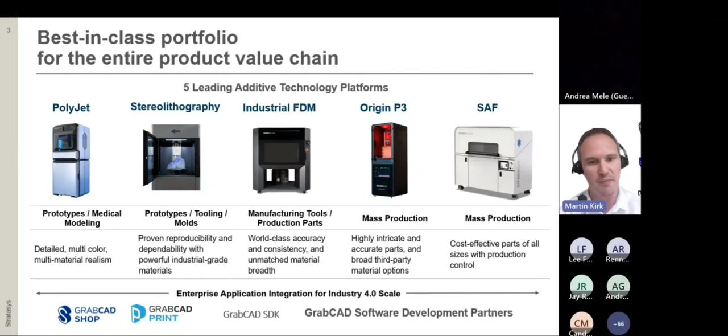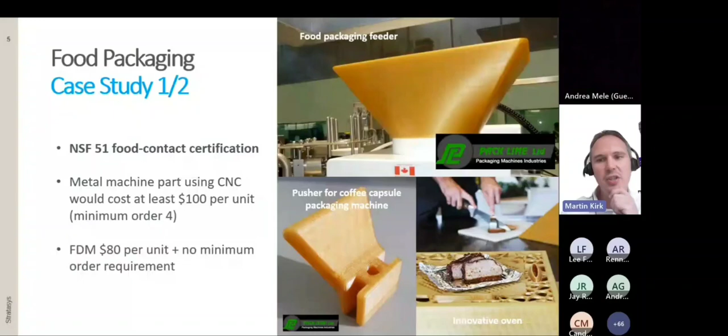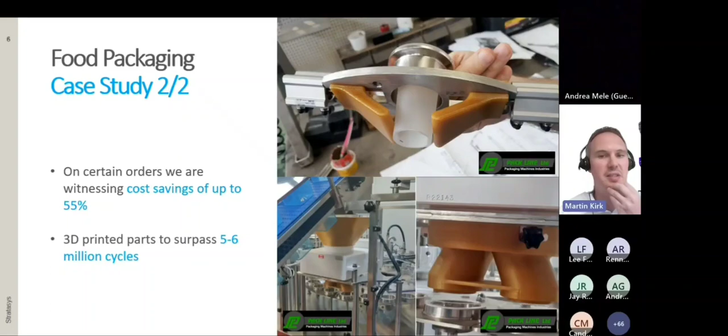Switching materials to Nylon 12CF, this is Rocky Mountain Chocolate Factory. They're printing end effectors for lifting wrapped chocolate bars. The existing metal part was malfunctioning, so they needed replacements with faster lead times. They switched to Nylon 12CF, reducing machine downtime, and they can print spare parts on demand, and it was a cost saving.

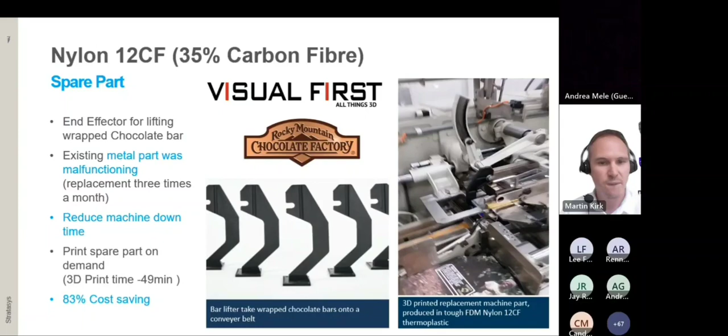This is Eckhart, develops automation tools for Ford, again using Nylon 12CF to replace metal components, but they also use ASA for simple non-structural jigs. The solution is lighter and cheaper than machining, and it's great for end-of-arm tooling because of the weight savings.

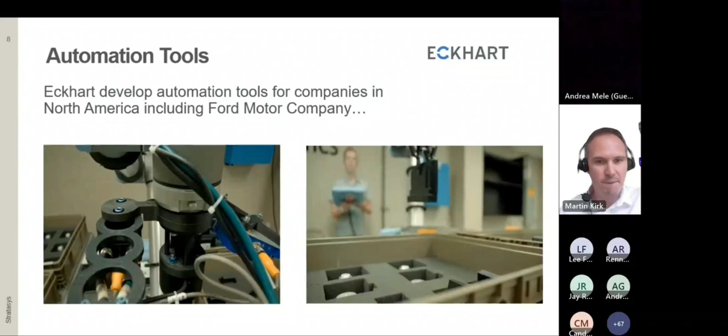This is a nice example from one of our customers. Hopefully, is the video running, Nancy?

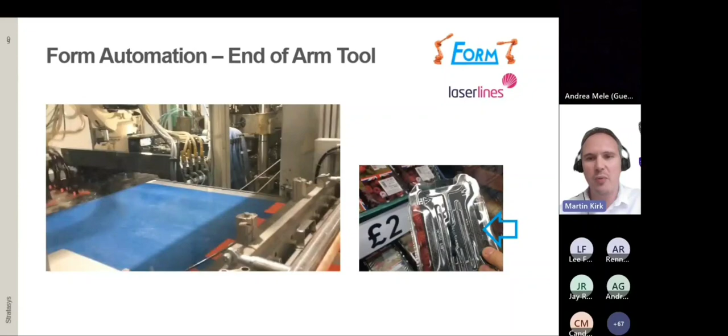Yeah, great. This is a nice example from one of our customers. It's form automation, so pick and place. The challenge was to improve the existing process for end-of-arm tooling. Basically, the gripper fingers were bending out of shape. You had small loose parts which could possibly fall into the food trays, and the components were manufactured externally.

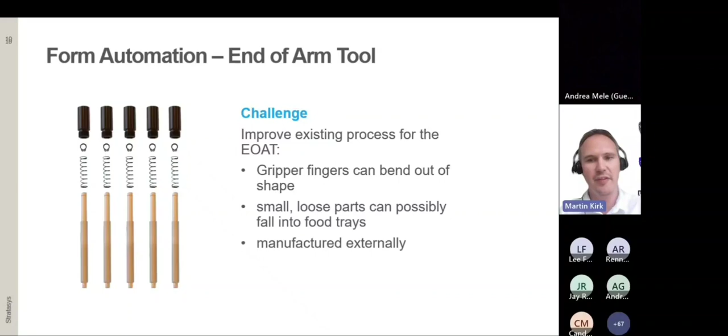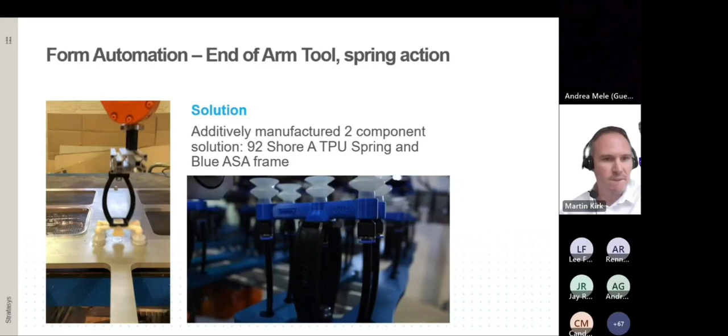So the solution was to additively manufacture 2 components, a 92 Shore A printed via FDM as a spring, and then a blue ASA frame. The assembly reduced from 20 to 2 pieces, so easier to assemble. The flexible material is less likely to break, easy to replace if necessary, resulting in reduced maintenance, and again, it's lighter and cheaper to manufacture.

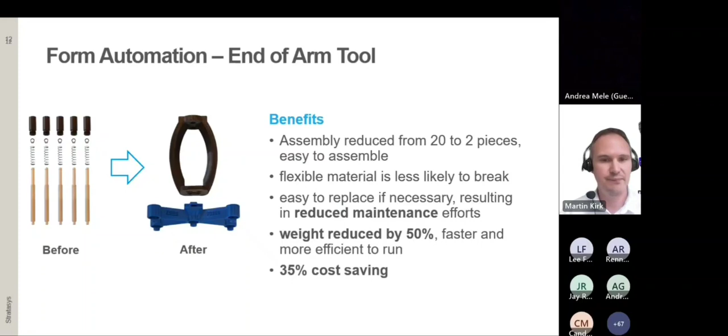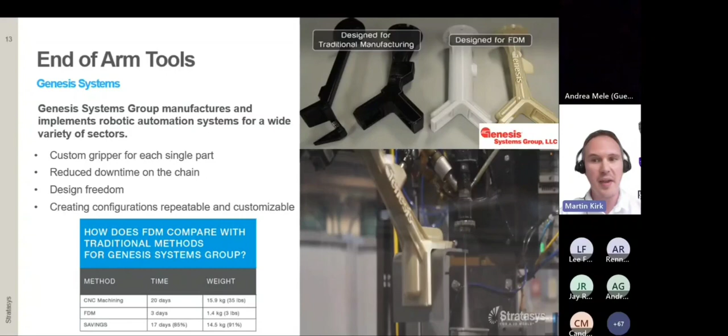This is an application from Genesis, custom grip for each single part. So custom parts every single time, printing in Ultem, ASA, Nylon CF, design freedom from AM, and then allowing repeatable and customizable parts.

Engine parts can free up CNC machines. So for production parts, rather than machining the fixture, you can directly print the fixture and the jig to free up the CNC, and then you can obviously machine the part that you want to machine using the FDM polymer substrate.

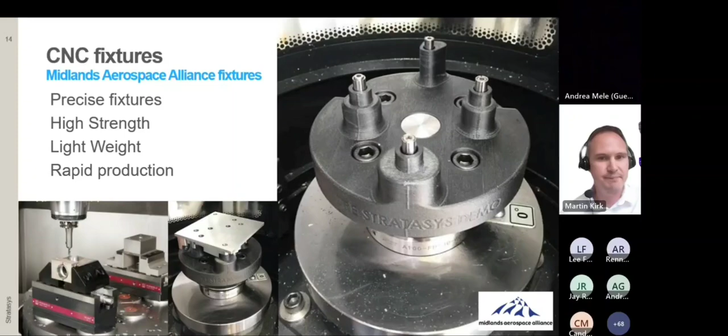It's great for obsolescence. Metal parts can be replaced with Nylon 12CF. It's 3 to 7 times lighter than aluminum or steel. It could withstand 1,000 bar of compressive strength. And again, it can be faster and cheaper than machining.

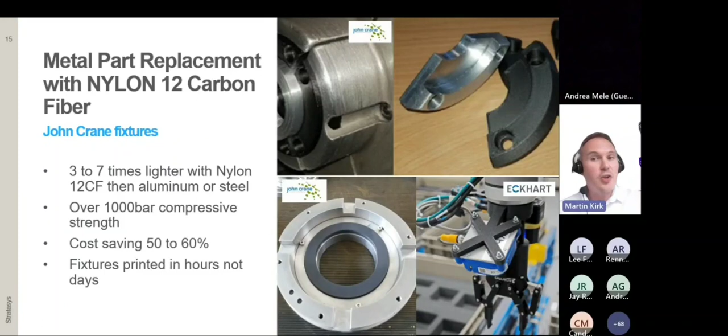You can print form tools. This is an example from Safran, forming 1.6mm aluminium, 500 parts possible off a single tool. You can also form titanium, so that's a 0.5mm thick titanium part. The tool has no finishing or coating required on the tool and can still withstand 500 parts through a cycle.

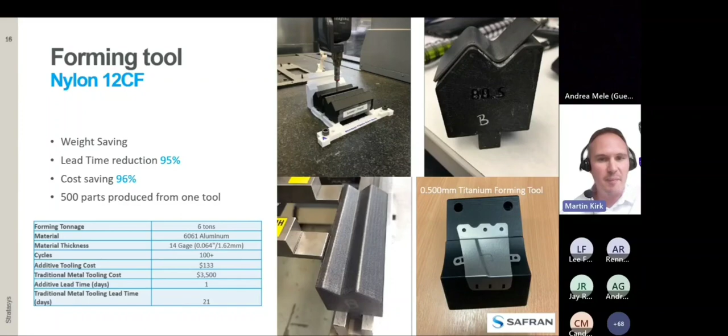You can print for aerospace. Boom Supersonic print hundreds and hundreds of drill jigs, fixtures, assembly jigs, but you can also directly print functional prototypes as well as flight parts, specifically in ULTEM 9085, besides the certificates for aerospace for in-cabin use.

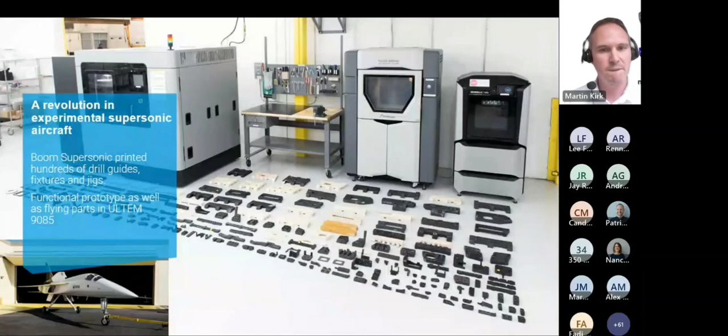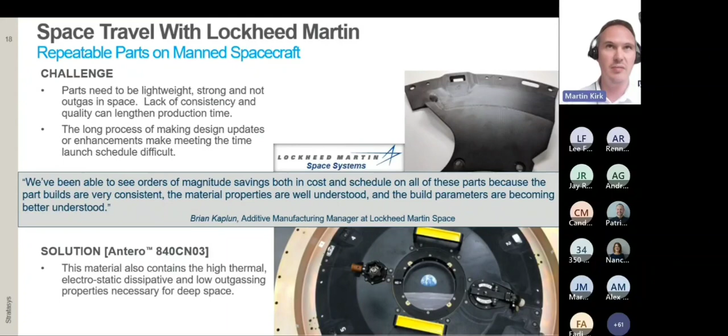So a quick summary of where FDM is. Basically, yes, it's great for prototyping. I still use it for prototyping on small little hobbyist machines. It's great for PLA, quick, simple geometries. But what we've seen in developments is the composites, which has opened many, many more applications like CMM fixturing, so really stiff components, form dies, even production spare parts using FDM.

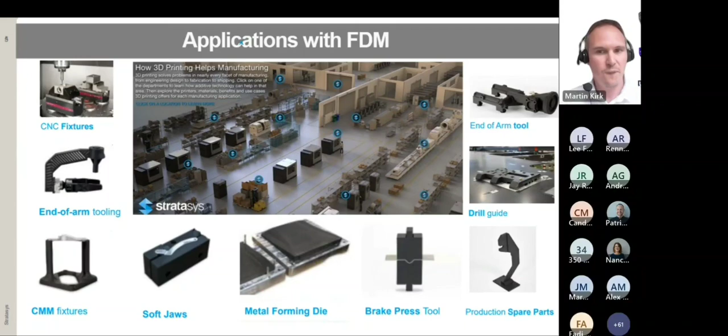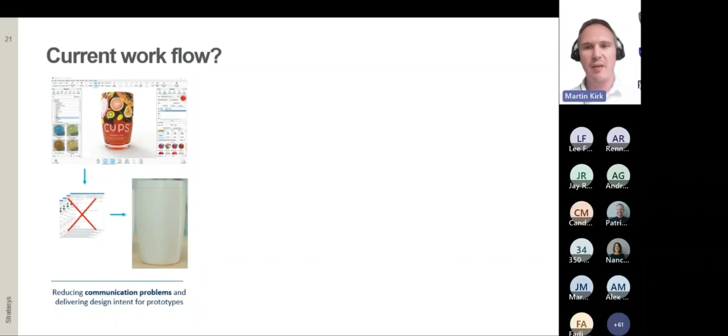Switching technology, next PolyJet, the world's leading full-color multi-material system. Not to poo-poo SL or SLS, but if you're doing packaging, it was a single material color. And if you wanted full color packaging, you would then have to glue, stick, or paint the SL or SLS part.

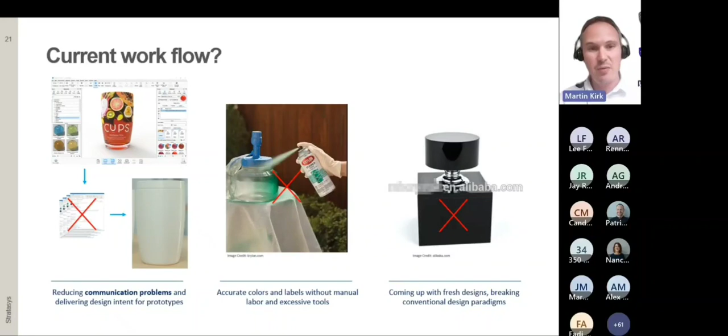What you can now do is print directly from design or rendering software like KeyShot, and then import directly with a 3MF file into GrabCAD.

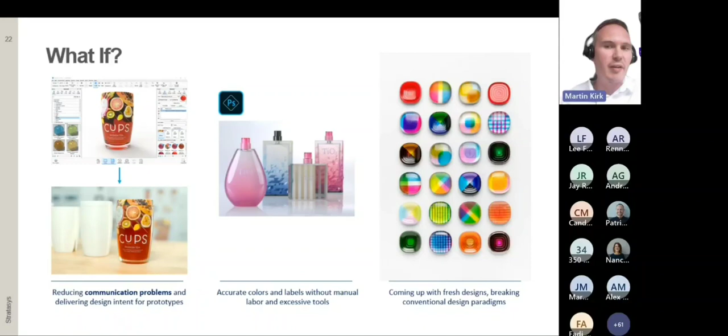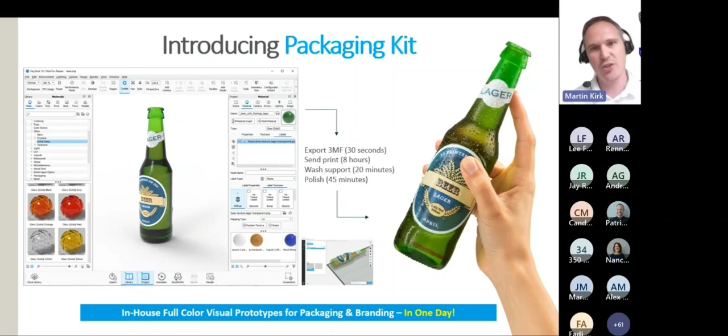So this is a nice example, a bottle that was printed in 8 hours, 20 minutes to wash the supports, and about 45 minutes to polish, either via wet and dry sanding or a polishing wheel at low resolution revs. I'm still blown away that that is actually printed, with the water droplets and everything.

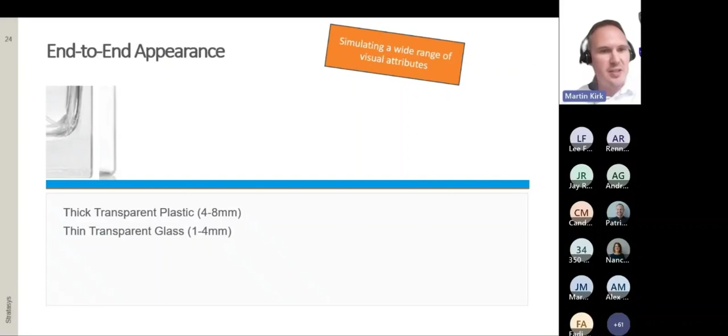PolyJet allows you to print thick transparent plastics, thin transparent glass, and solid colors. There are 500,000 Pantone reference colors available. You can print stained glass, and spray paint mask and clear sections directly printed.

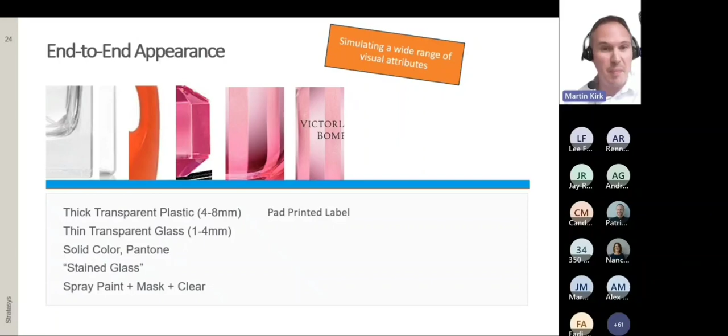You can print pad-printed labels, glue labels, shrink sleeves, liquids, or you can really show off and print all of the previous in one.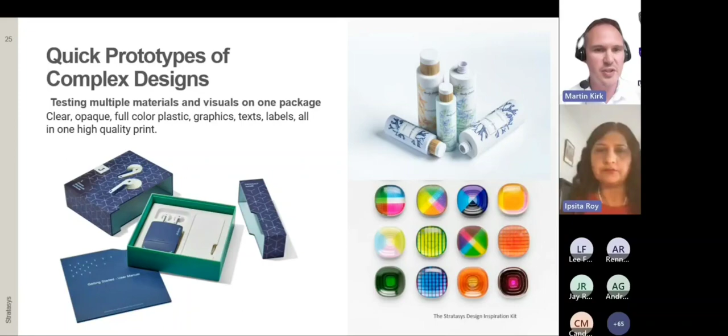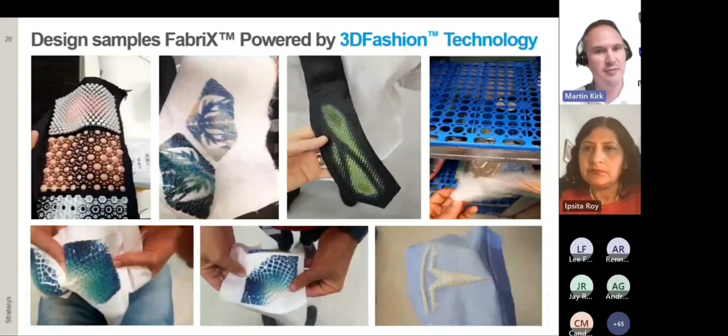You can also print on fabrics. Using the FabriX add-on, you can print on cotton, suede, and you can even print on nets. This is printed with PolyJet by laying a few layers first, a couple hundred microns, laying the net down, and then continuing to print to produce full 3D printed nets.

And this one of my favorites, with full flexibility. I love this one.

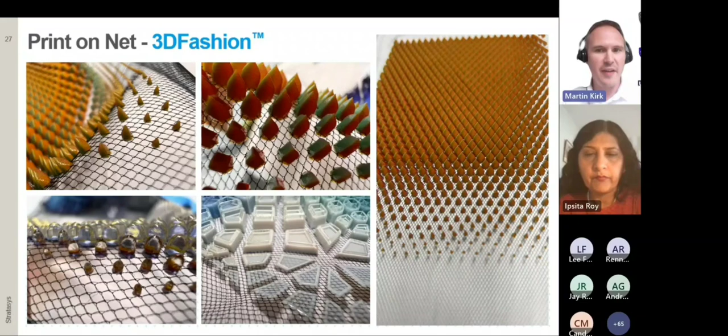Further examples of applications with fabrics printing: you can print consumer wearable electronics, again pausing the print, adding electronics, and continuing to print. Concept car interiors—I know a few automotive companies are discussing production with PolyJet—and of course fashion, again with production applications in fashion.

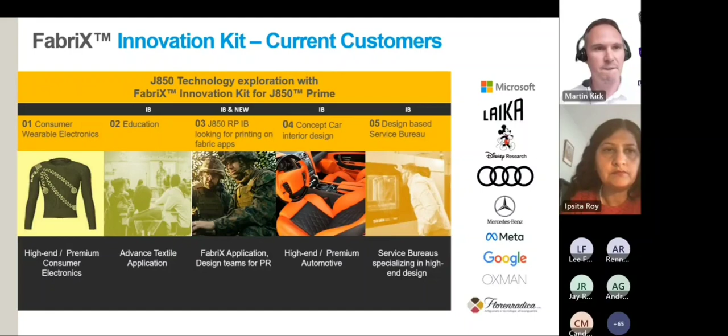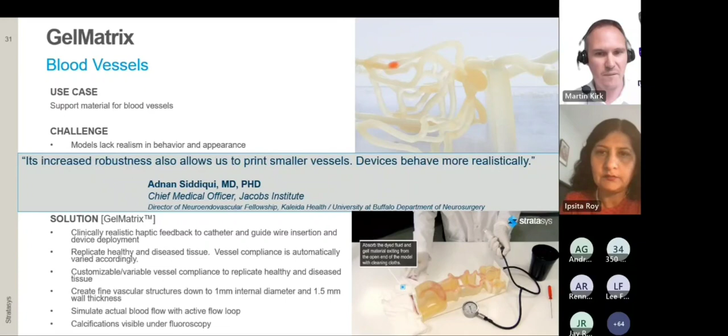There's a material called TissueMatrix, which is the softest material, I believe, in 3D printing at 30 Shore 00. Around the firmness of a gel shoe insole as a comparison, it's significantly softer than the original Agilus material we have on PolyJet.

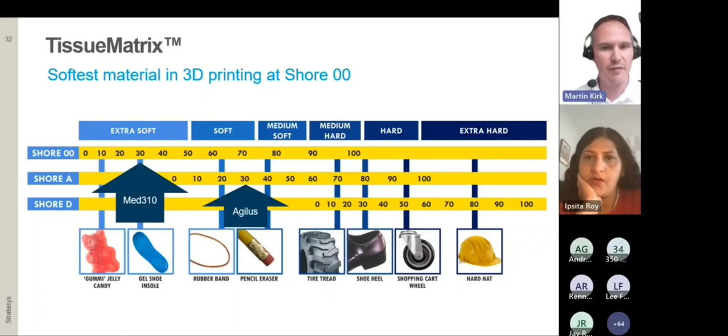The reason it was developed is tissue matrix can be used to replicate heart tissue and tactile feedback that translates to clinical test cases. It feels the same, it cuts the same, so it's more of a direct comparison to surgery. It's great for either practicing for students, or doing an MRI, printing the patient's heart, and practicing before you actually do the surgery.

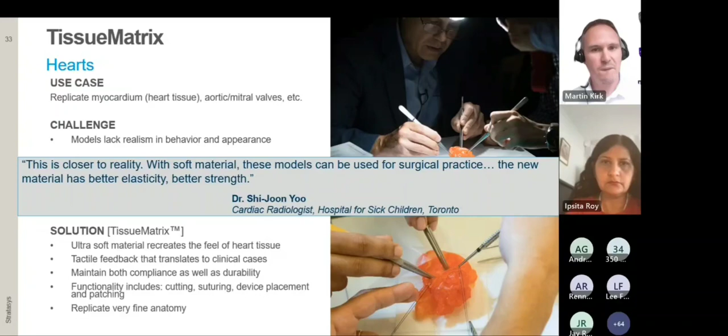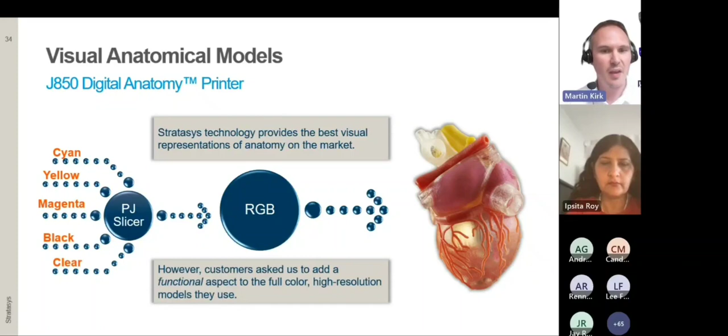So PolyJet, to summarize, can print visual anatomical models, full color. It can print functional anatomical models that behave and feel like the real thing—flesh, fats, bones, connecting tissue, skin.

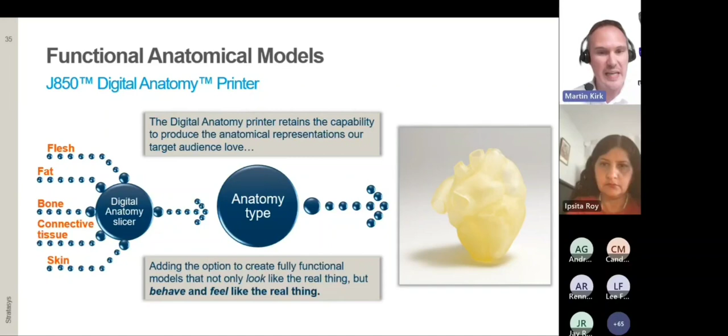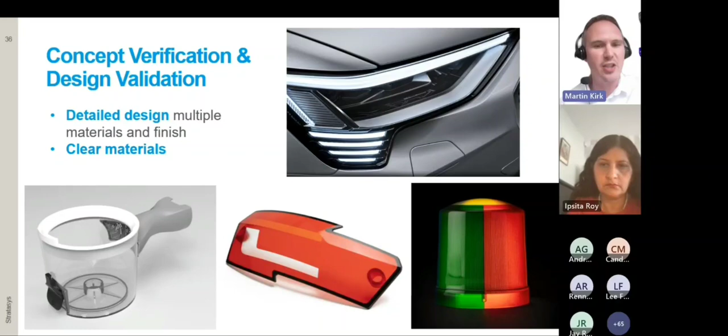It's great for concept verification and design validation, although I would probably use SL for pure transparent parts—it takes a lot of polishing for PolyJet transparent parts. But you can also do functional performance, up to 7 materials printed at a time, so you can do multiple assemblies as a digital mix. But because of the polymer science for PolyJet, functional—question mark—yes for fashion, but not actually fully functional for production, like in an automotive under-hood application. No for PolyJet.

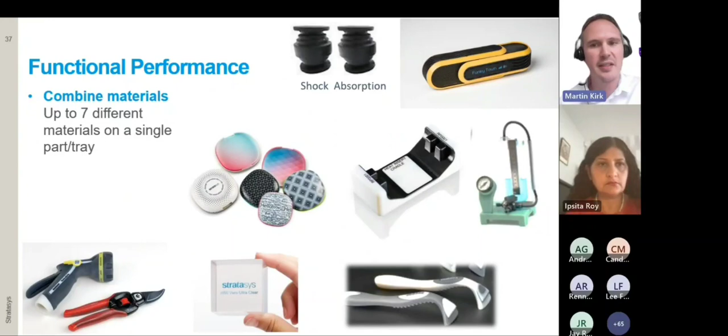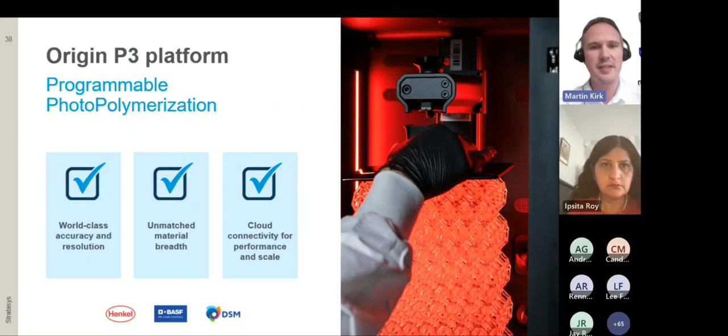Switching technology, Origin P3. This is out of California; Stratasys acquired them, I think, about 2 years ago. This is DLP printing, but how it differs slightly is Origin controls the build sheet.

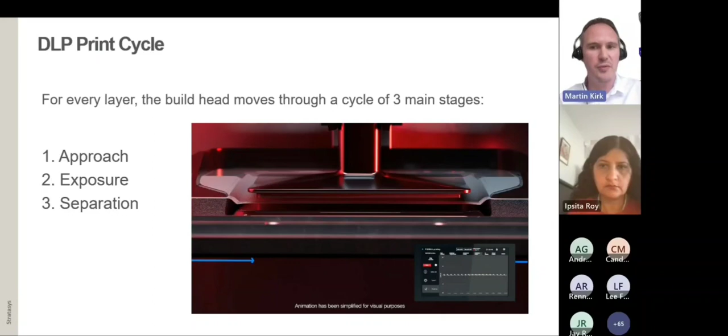So it's controlled and creates a bit of a curve, giving really low separation forces, which creates really beautiful surface finishes and really accurate parts. You can also print incredibly flexible resins, which on most DLP you can't, because of the separation forces causing deformities as you separate.

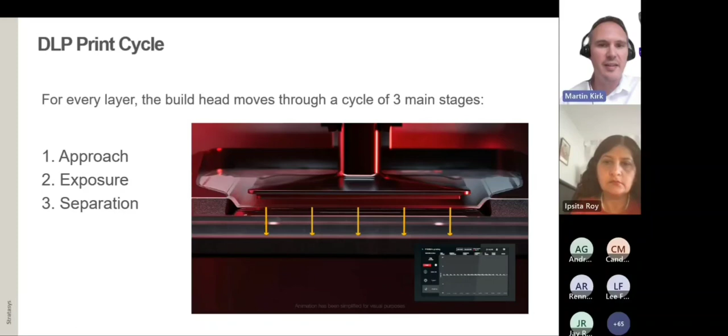A couple of examples, let's look at the Loctite applications. This is Loctite 402. It has great elongation at break at 230%, good tear strength especially against PolyJet, with a number of Shore values available. It's also, because it's DLP, a lot faster to print.

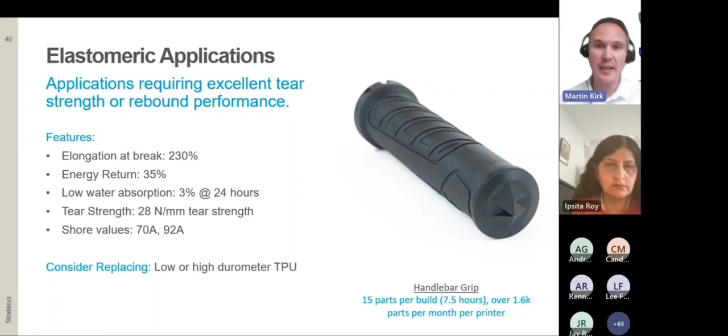Henkel Loctite 3955 is one of my favorite materials so far that's come out. It can be used for aerospace. It's got a UL 94 V0 flammability rating, 300 degree heat deflection temperature. The only downside I found with this material is elongation at break at 2%.

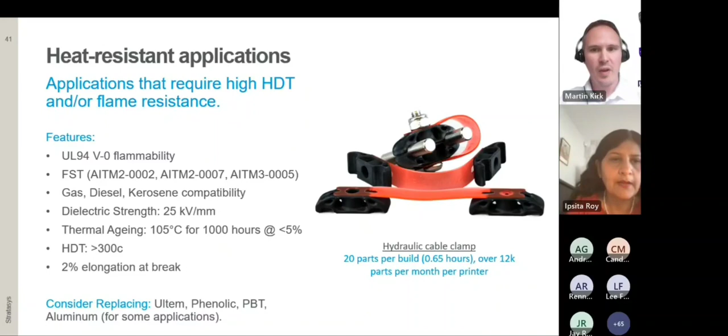Automotive interiors, exteriors, under hood - BASF ST45 is great, Loctite IND403 is good, tough, durable materials that can be used in production. Again, question mark on certificates for these applications, but it's coming.

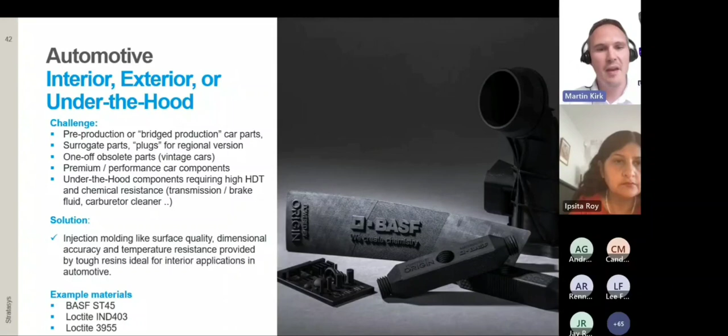Another tough application is Loctite 3172. I really like this material because of the elongation at break - it's got 108% elongation at break. So that one's been bent on itself and it still returns back to its original form. It's great for replacing HDPE or impact modified polypropylenes.

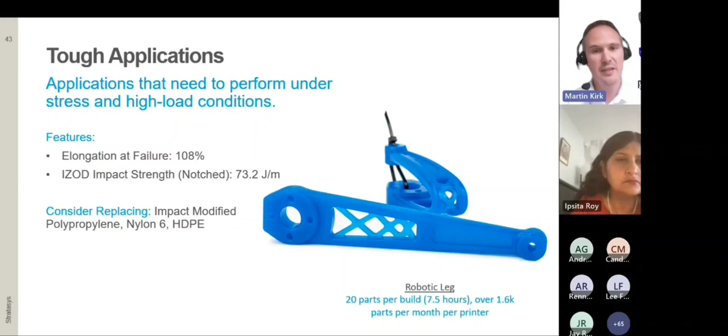It's a really, really nice material to print with as well. The Loctite 3955 is quite tricky to print with. This one's a lot nicer to print with.

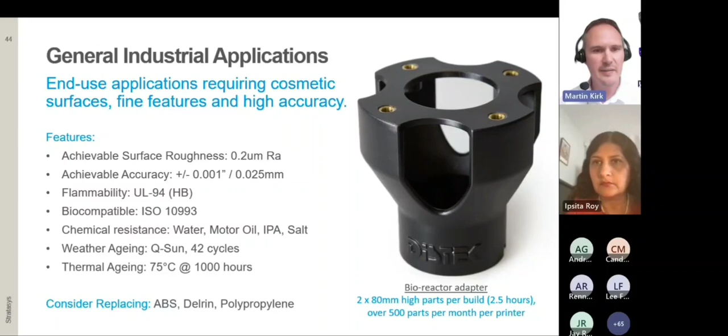So to summarize DLP, you can print housings, connectors, TE Connectivity. They're running their Origin directly for production - connectors, clamps, injection molds, small molds, medical components, gaskets, and especially handles - anything with long elongation at break is great for this.

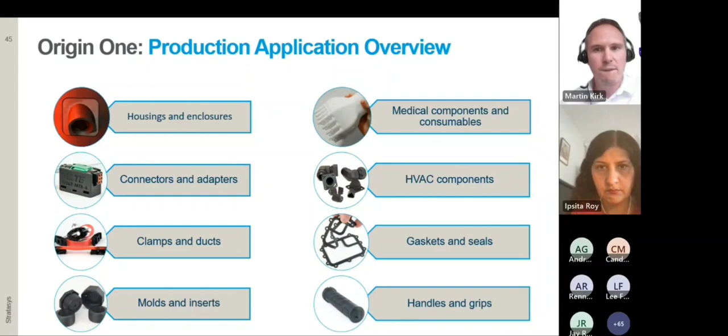Switching technology back to Andrew's background, it's Stratasys Neo. So the Neo range of materials, I'll cover a few of them.

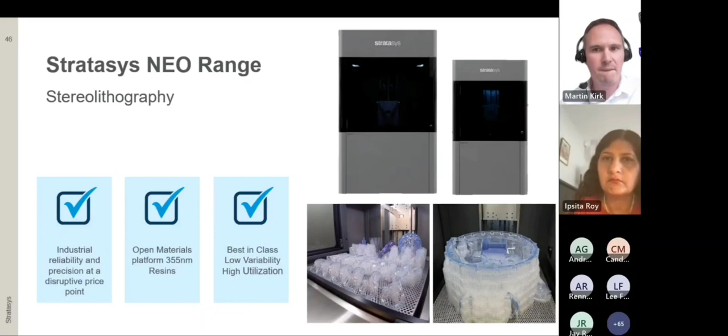So Watershed XC, I was using this back at Materialise. It's a brilliant engineering material. It's clear with polycarbonate-like properties, highly versatile for general engineering. But what I see it most used for is vacuum casting patterns and prototypes. The heat deflection temperature is only 50 degrees, so it's very much more for prototyping and patterns rather than actual end use parts.

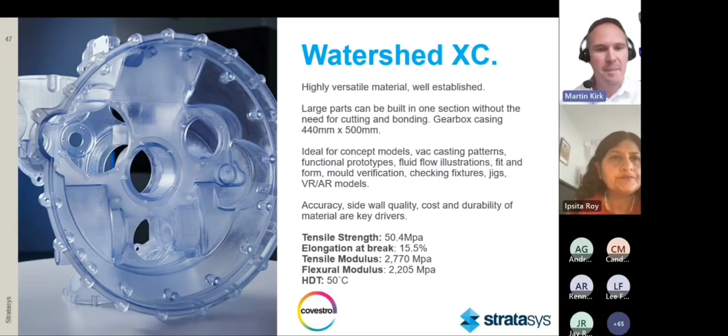Somos Perform - this is a fascinating material because it's ceramic filled. It's got a high heat deflection temperature, tensile modulus of 10,500 megapascals. It's predominantly used in Formula One and aerospace for wind tunnel testing because of the stiffness, but it can also be used for tooling because of the exceptional sidewall quality.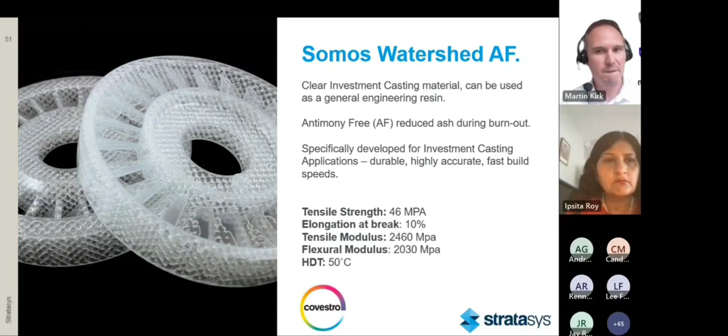So to conclude on SL, a few further industrial SL applications. I've highlighted the most common in blue, mainly for prototyping, but there are some production applications, especially as the resins continue to improve.

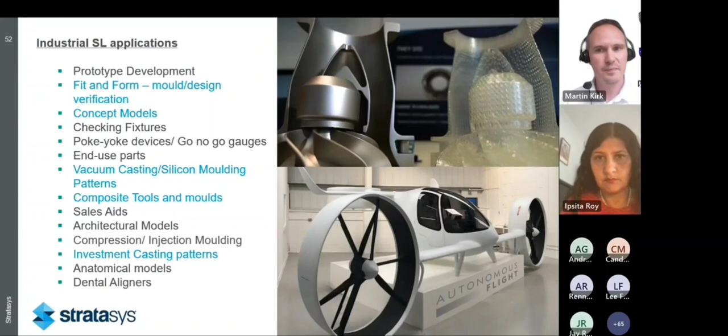And then finally, introducing SAF, so selective absorption fusion. So you should see this video running - this is two sleds printing in PA11 or PA12.

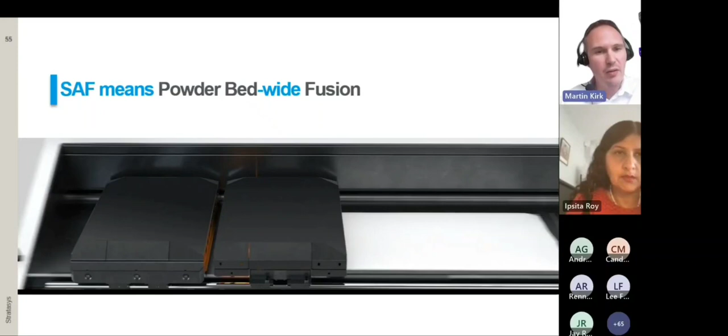SAF uses an inline architecture with two carriages, enabling recoating and relatively cold powder while immediately heating. The advantage is SAF allows higher nesting densities compared to competitors, up to 15% as standard, which speeds up print volumes while not affecting deformity by controlling the heat.

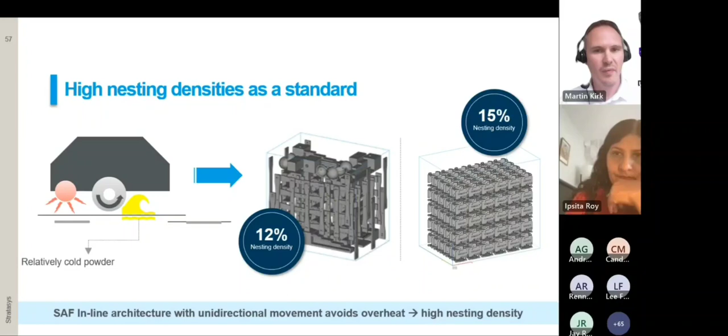Great applications for SAF include H350 PA11 moving parts. PA11 has a really high yield, so it's great impact strength. It's also sustainable, coming from castor oil rather than dino juice. Long term, I see great applications especially for companies focused on sustainability. You can print moving parts, quality durable parts, robust and even bulky parts. Because of the heat control, you can print jigs, fixtures, and brackets which would struggle on other powder-based systems.

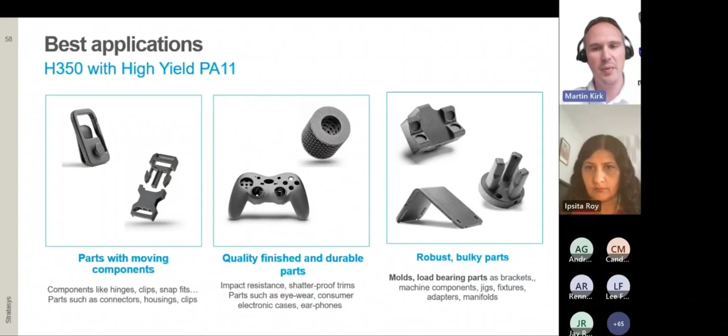Automotive components like side mirrors, air ducting, and electrical cabling clips.

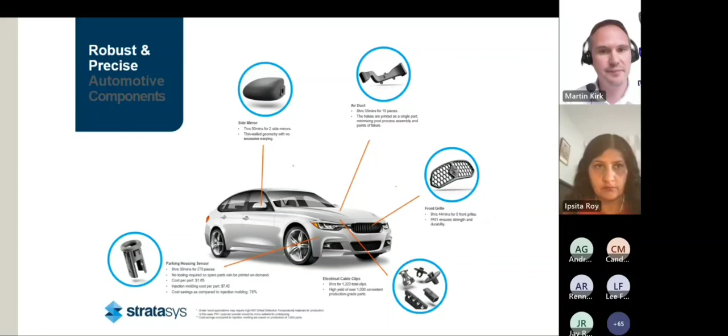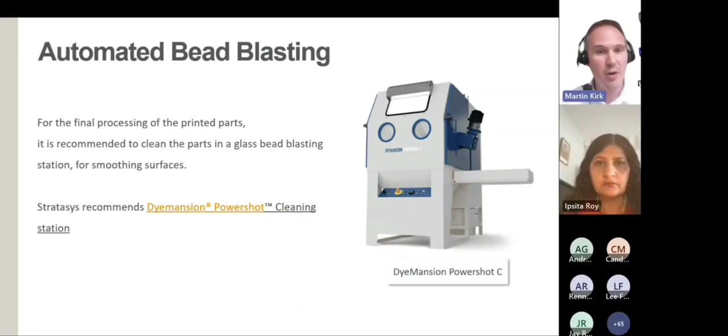When you remove parts, you can automatically clean them. We use the DyeMansion PowerShot C, which is glass bead blasting, to clean the parts off. You can then dye the components using the DyeMansion DM60, which automatically dyes parts. You can take it a stage further and shot peen using the DyeMansion PowerShot S, so the part is shot peened and dyed via the PowerShot S.

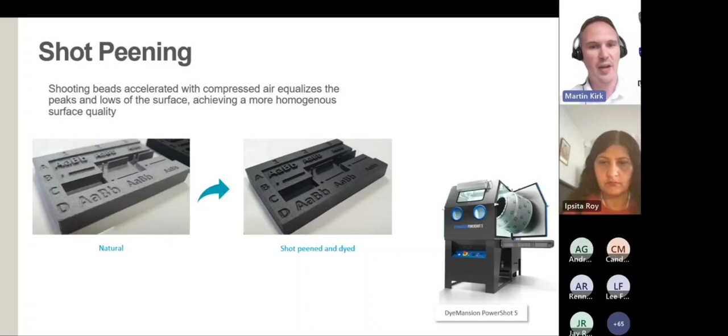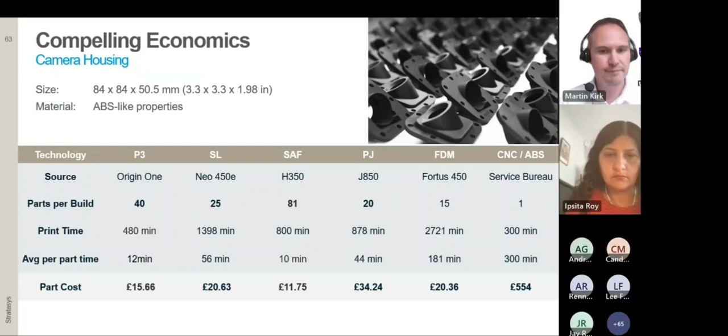Okay, thank you. Hopefully that covered very briefly every single range. I could go in for hours on the Stratasys range, it's nuts. So I'll just stop sharing this slide.